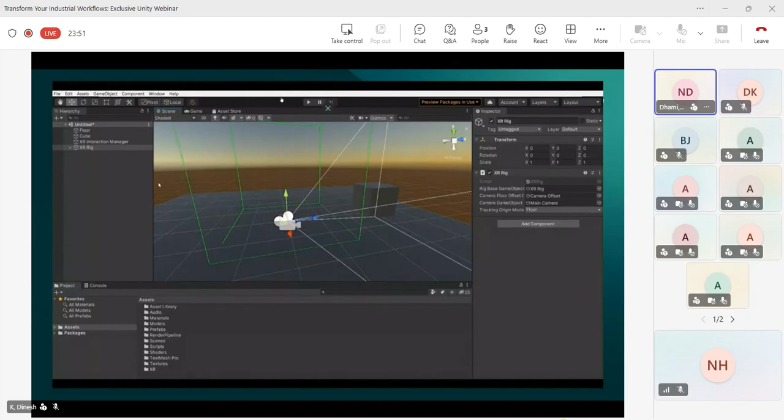Let's try to create a plane and see how easy it is to create an XR application. I've placed a cube, and I've also placed a room scale rig, so automatically my room scale use cases are sorted. I don't have to do much for configuring, and you can see the XR rig already contains components like the main camera, left hand controller, and right hand controller, with generic use cases already working.

So let's say if I want to add a grab functionality, I'll add an XR Grab Interactable script to my cube, and then it's basically working.

It's very simple, and Unity has been designed in such a way that you can easily work for almost all the use cases you intend to work on, with generic use cases already covered. These are the platforms we were previously talking about, the formats you can easily bring into Unity using the Unity Asset Transformer plugin.

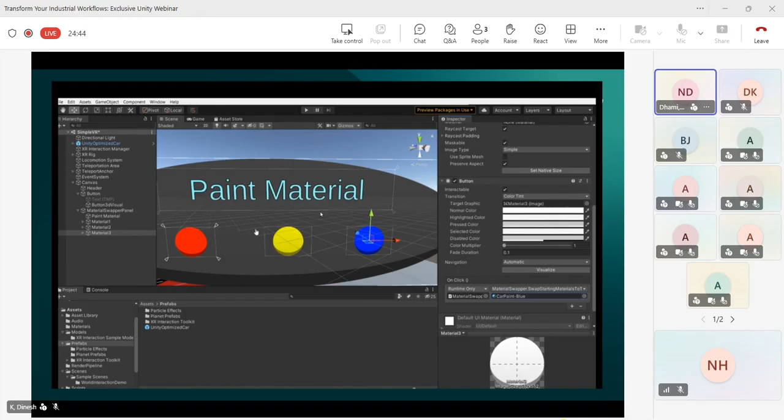Then there's another use case of creating a simple VR application, where again we've added plane components, and on a click of a button we're trying to swap the materials, or enabling and disabling them.

If I play it, and click any of the buttons of that respective color, I'm basically doing a material switch with a paint material. This is a pretty basic kind of use case we've created, and the material enabling and disabling code is not production ready, it's just for samples and demos, so I wouldn't recommend using it for other purposes.

Then there are global post-processing volumes and stuff, where you can tweak your lighting and look and feel the way you intend to use it for those particular use cases.

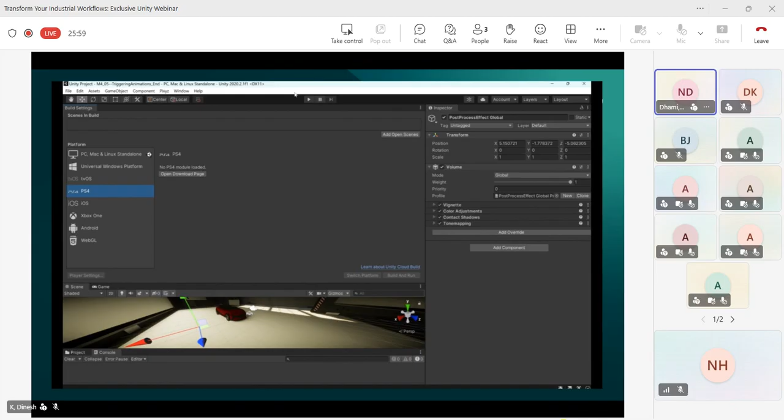Let's try to do a build as well. These are the platforms you're generally able to build for when using Unity, such as tvOS or Android. This is a sample application created by Volvo for their own use case, where you're able to change color, open doors, and add rotation.

Then, let's say if you want other movements like free camera movement, you basically add those positions to your camera, and you're moving to those particular places.

So these sort of use cases have already been created and are already being used. This is a simple series of steps that you have to follow.

You have to add XR Interaction Toolkit, and then respective plugins that you need, like XR Plugin Management. Let's say you're creating for Oculus, and these days even XR Project Validation is available, so you don't have to worry whether one plugin is conflicting with another. Those steps are already sorted for you, and it's very easy to use and create applications using that.

And not only this, in the other videos we'll be seeing that with the help of LLMs and the coming of AI agents, you can also integrate your AI agent using MCP server configuration, and it's pretty easy to code as well. Now let's move to the next slide.

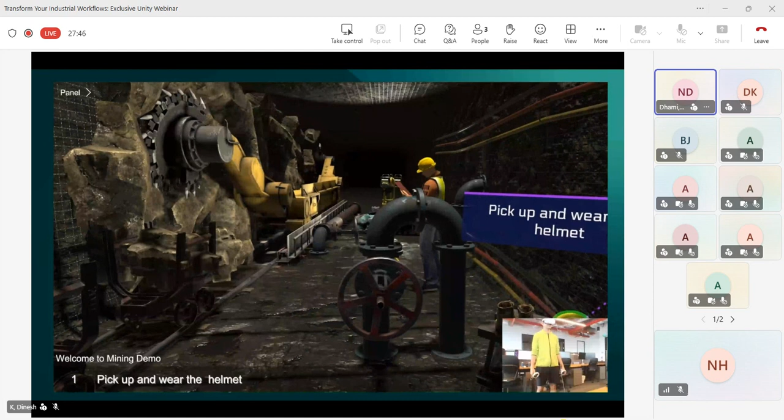Welcome to Mining Demo. Please pick up the helmet to begin.

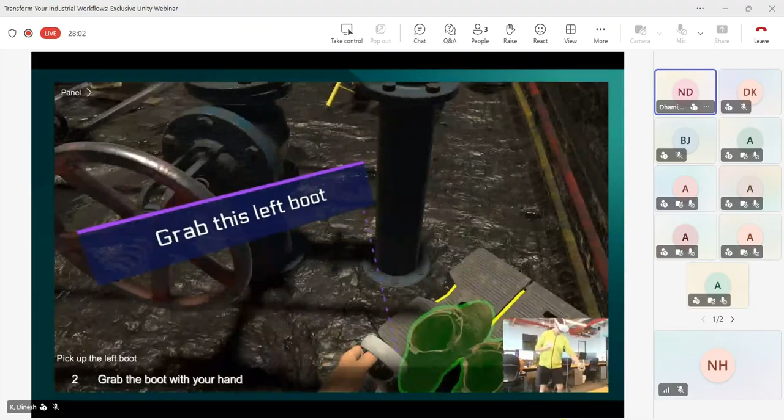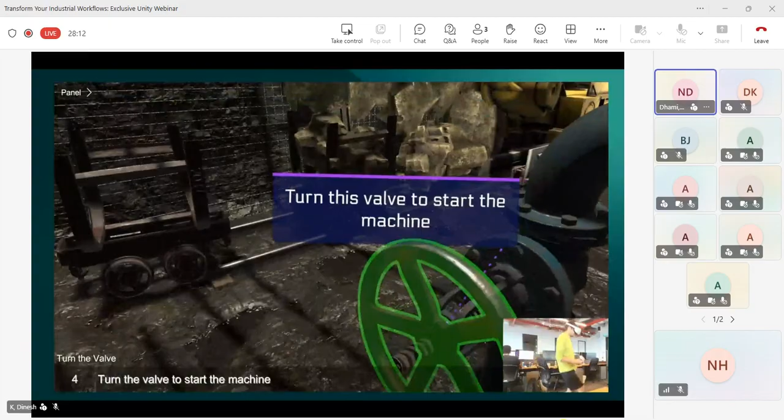So what we are seeing right now is a demo video of HTC Vive, and this is a training SOP application showing how it typically works. You have to grab a boot, and then do the next step for safety training. For use cases like safety training and critical operations, it's very important to train your workers, and all those use cases can easily be created as applications.

So on and all, we have seen how easy it is to create any sort of XR applications using Unity. The first step is importing your packages, drawings, your existing 3D data and other things using Unity Asset Transformer, bringing that into Unity.

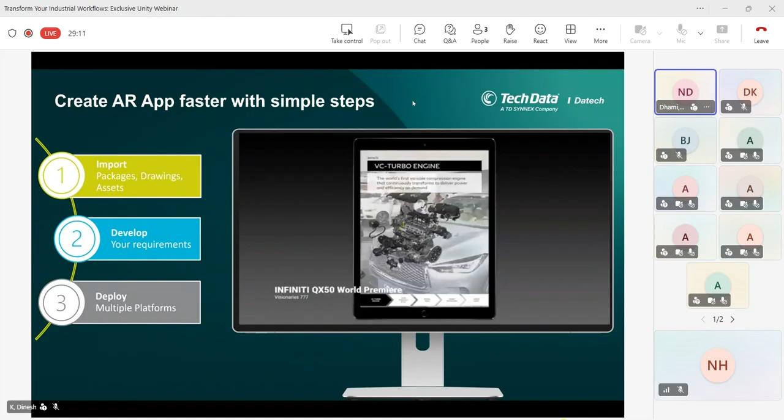Then you would be developing your applications, doing Connect - connecting your data with Unity-specific components that are available. Then you do Deploy, publishing your applications to multiple platforms that you intend to publish on. So these are basically generic steps for any sort of platform. Next slide.

Product configurators have become very famous these days, and a lot of companies are using them. We would be seeing how to create a product configurator using a demo video as well. Can we move to the next slide? Camille.

As step one, you would be downloading your package - let's say we are creating a new sample project. You need to set it to your Unity Universal 3D project, then go to an open source project published by Unity, and add it via Git URL. Once that's done, it's almost readily available.

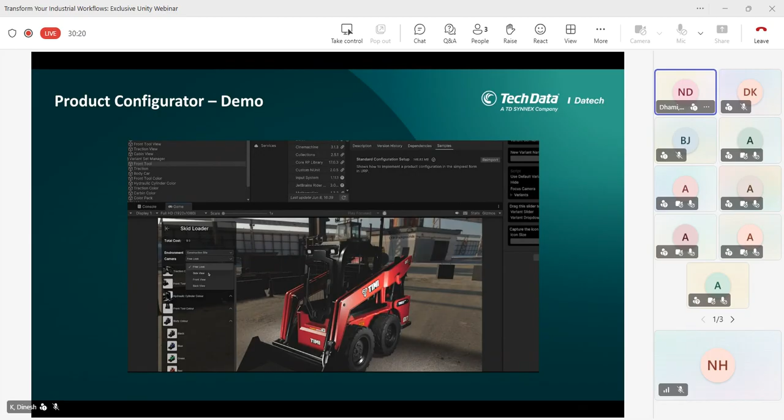Features like changing materials and colors, and changing the camera look - like free look or side view - those sort of features are already built up for you.

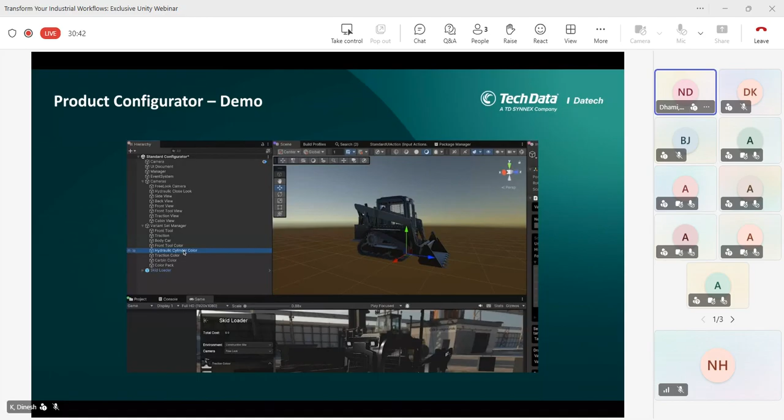So let's say you intend to create a product configurator application for your particular use case. It comes very handy, and all the components are there - there's already a scene existing which you can explore. So let's try to build our own one.

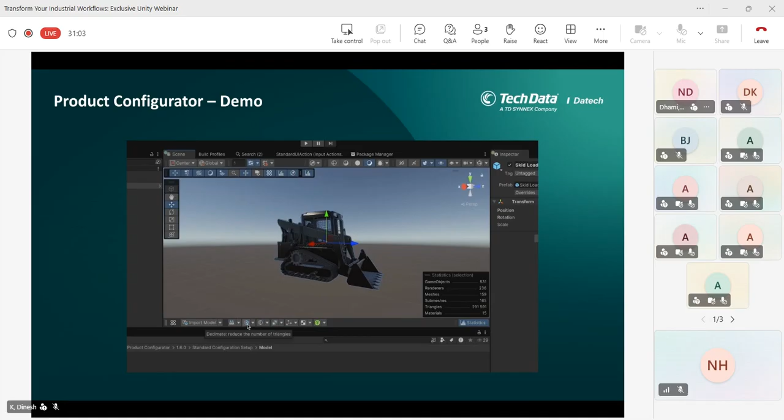So we'll create a new scene, and I've basically added an existing skid loader game object to the hierarchy. Not only this, you can also upload it to a particular asset manager page, and then the asset transformer page, and bring that particular model from there to here.

Then you add a material variant set. This is already a preloaded kind of thing, and you just have to add the reference material - like the black one - and capture what sort of new variant you want on a click. So it's a good project, I'd say.

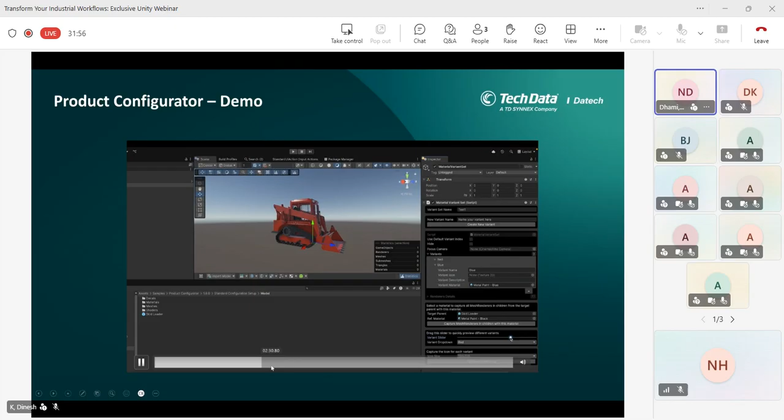If you are going to create your own application for this particular use case, you should definitely look it out. So now we are adding buttons, using the old Unity UI Toolkit for this use case.

So we dock it, and we have added a variant set - index 0, you've seen red now. Then what we do is, on click, we have configured the red button - on click of red it turns red, and on click of blue it turns blue. So we have linked that with the on-click event.

And now if you see, when it is being played - on clicking blue, I'm getting blue, and on clicking the red metal button, I'm getting the red metal button. So again, it is very easy to use a template like this that is already provided.

So now we are trying to add similarly the Cinemachine object package, and then we would be doing camera positions, so that we can add respective places where we want our camera movements, like flyby camera and stuff.

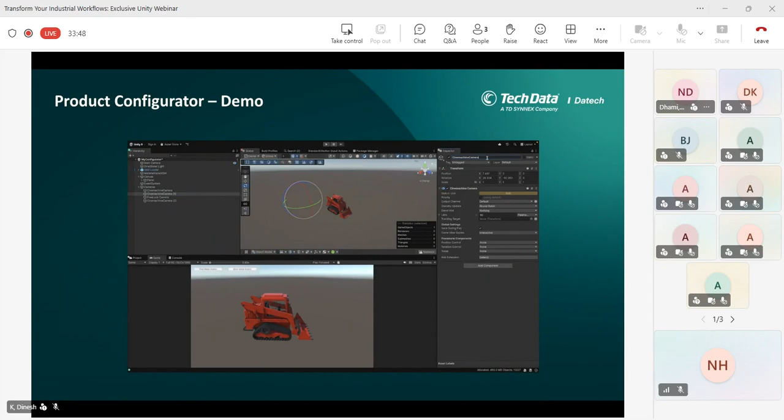So again, I have added the positions, Cinemachine position 1 and Cinemachine position 2, that you are able to see. And then I'm setting my angle, and I've added a free look camera as well. Then I'm adding everything under a single game object.

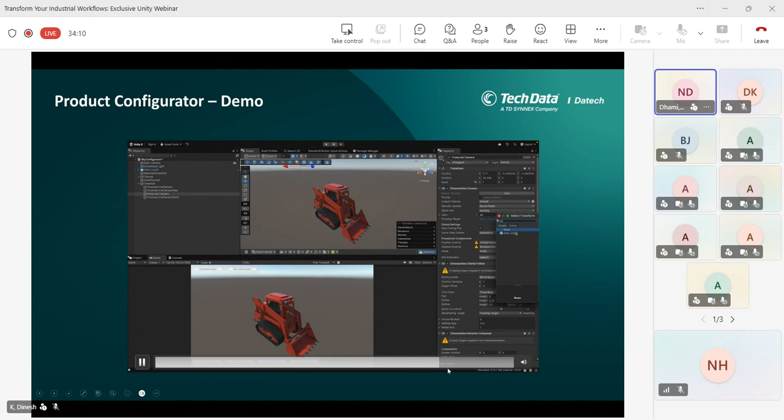So I have set the priority as well for my Cinemachine camera setup. And once that is done, I can similarly replicate the buttons. So for each and every position, I'll be going to a button, and on the on click event, I'll be setting where the camera should be moving.

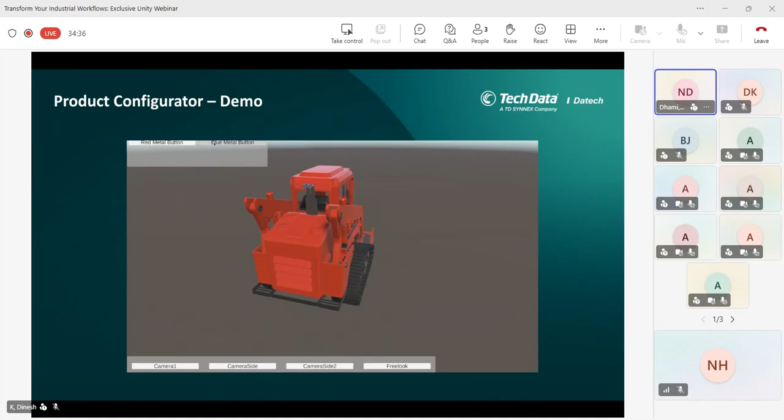So to multiple positions, I have respectively added where the camera should be moving. And also let's do a WebGL build for this time. So it is done. You have to do a build and run, and then in order to run this application on WebGL, you should be able to host it, using servers or any other local application if you're trying it local.

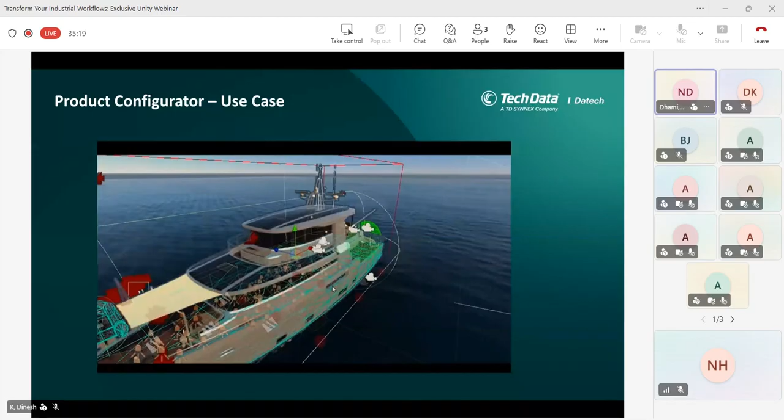Oxen created their Explorer vessel configurator in Unity with the help of Asset Transformer Studio for file optimization, streamlining their content production and driving pre-sales before the vessel was even built.

So many product configurators were built with Unity Industry, a special tier made for industrial use cases, by enabling dynamic, personalized 3D experiences for exploration and customization. You can enhance the overall buying journey, leading to higher satisfaction and increased conversions.

So as mentioned, product configurators are pretty common these days, and a lot of folks are using it for marketing, or letting customers explore how everything looks beforehand, and give it to the customer so that they can understand better. Now let's move to the another topic, that is HMI.

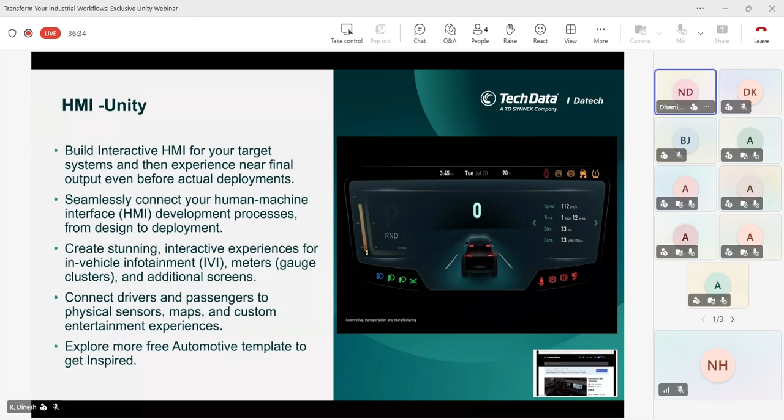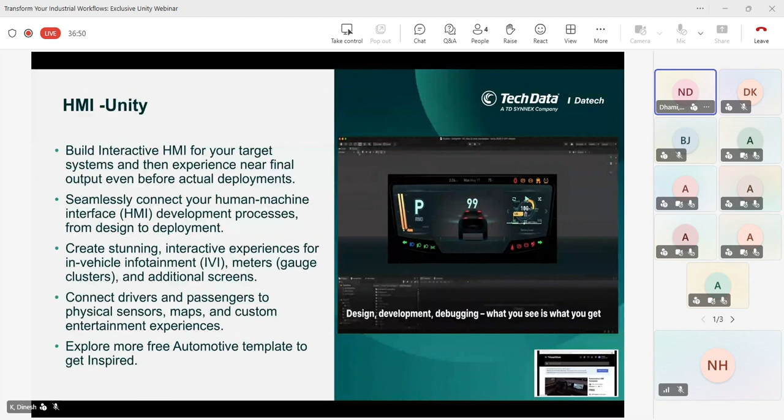Next slide, please. Now, using Unity 3D engine, you can not only create some applications like product configurators, or AR/VR applications. You can also create applications for your screens, right? You can build interactive HMIs for your target systems, and then experience almost near final output even before the actual deployment.

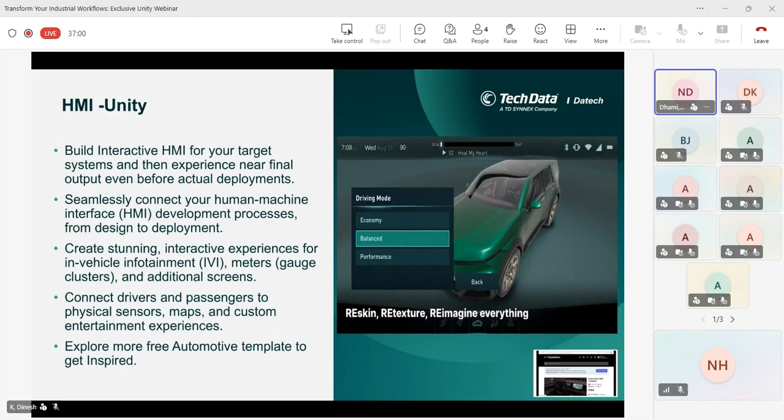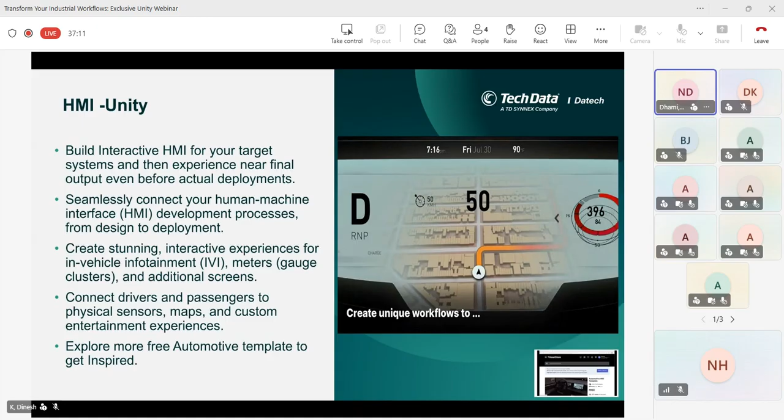So a lot of big names like Mercedes and BMWs are already using this to enhance their experience, because they're able to get sensor data and other stuff, and able to show that in a 3D interactive kind of fashion. Then it seamlessly connects to your human machine interface.

It's very easy. You are able to connect your drivers and passengers and physical sensors, and you can map custom entertainment experiences. And not only this, if we move to the next slide, you can see. Can you move to the next slide?

So pretty standard project, pretty handy, and it's a must try for use cases like single screen, multi-screen, split screen. You can learn and see even how to design such use cases, and how they are working behind the scenes.

So let's say in your car you want to access contacts for that particular use case, or for accessing other profiles.

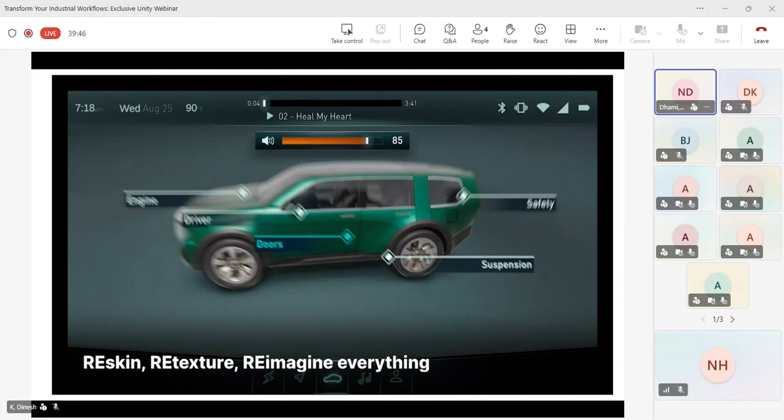So in an interactive or gamified format, you can show how to take routes, or how to play music, and you can do transitions, contacts, and other stuff. And then if you want to modify, or let's say your team and your stakeholders are not liking the design of a particular color, it's very easy to change it.

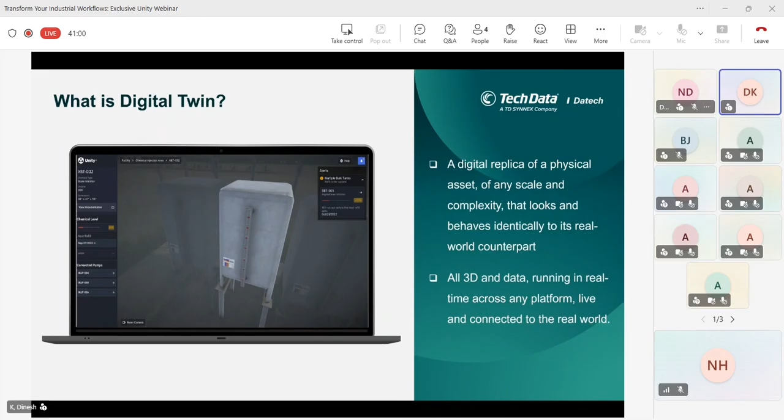You can do it. So that's the basic concept of a digital twin. Unity can also do that. So under Unity Digital Twin, we have around five levels of digital twins.

Level one is the virtual twin. For example, if you just need spatial awareness and want to experience that kind of thing, we call it a virtual twin. Basically, it's a physically accurate, realistic digital representation of an asset, so that you can experience spatial awareness and collaboration.

The second thing is the connected twin. So now the first twin is completed. Now you want to monitor real-time data and get that information, so this kind of thing we call a connected twin. It basically integrates with the real...

Okay, so there is, I guess, a fire safety hazard training going on in Dinesh's building. Let me just continue while he's back.

Then comes level 3, predictive twin, where you would be able to do predictions, as in analytics, decision assist, and predictive maintenance using your connected twin's data.

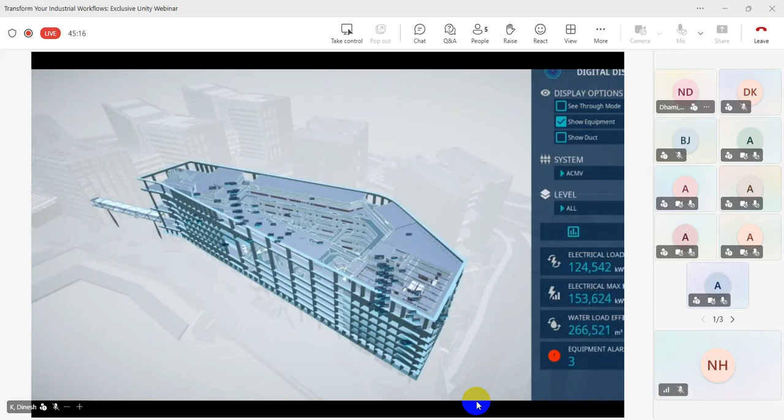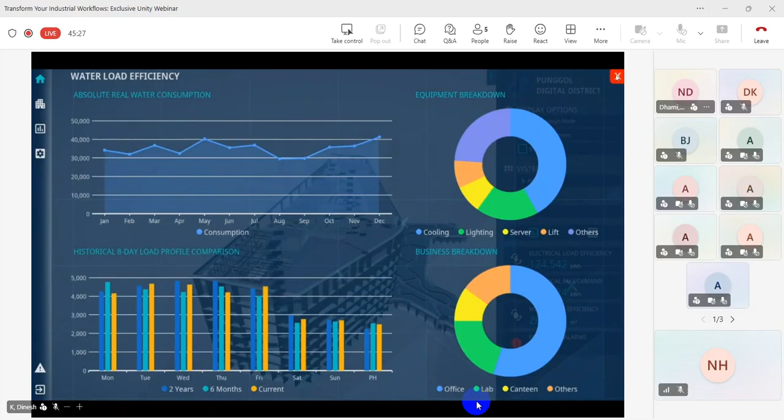The Estate Command and Control interface provides estate managers real-time updates on estate operations, such as power and water consumption, and electricity loads.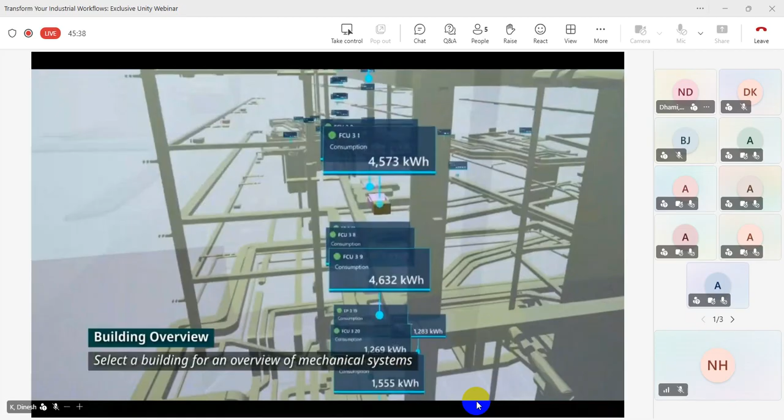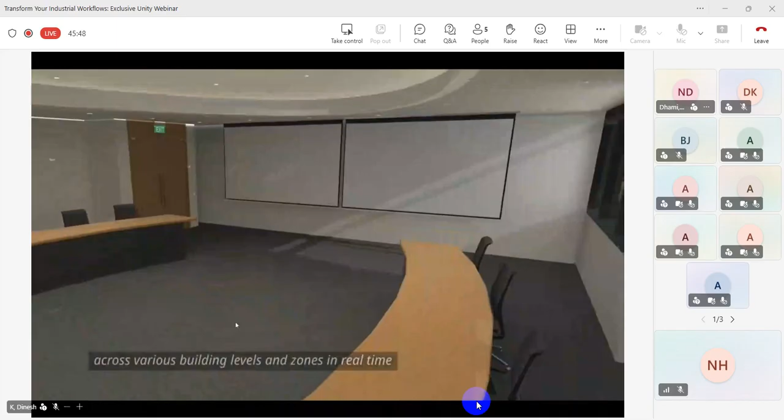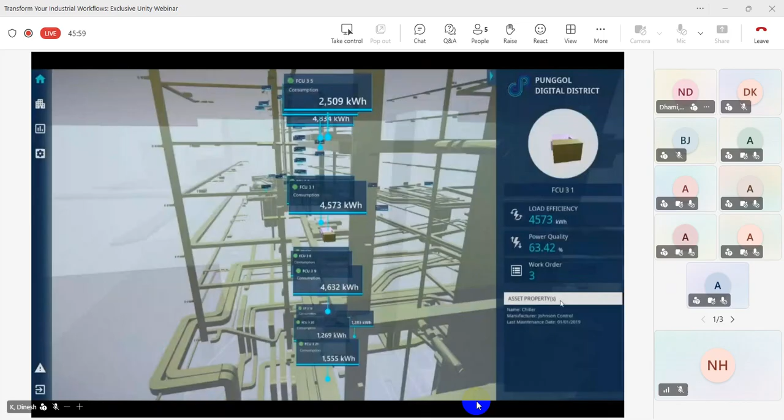In the building overview, visualize geographical positions of systems and assets across various building levels and zones in real time. Enable responsive maintenance with the help of real-time incident reports from the digital twin. Assign tasks to the nearest available staff to carry out maintenance and attend to incidents.

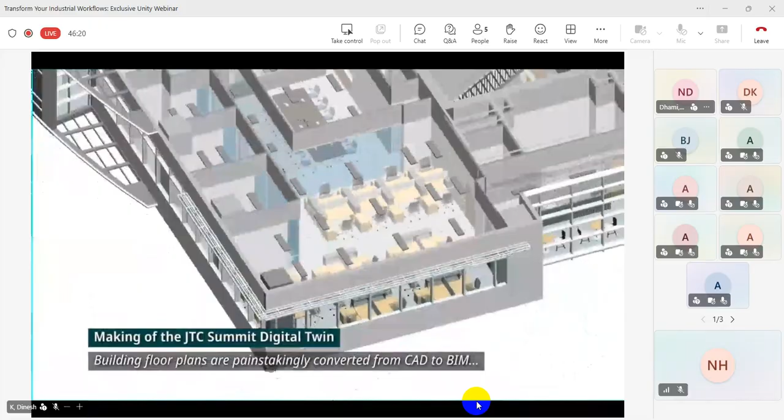The JTC Summit, a 32-story, 450,000 square foot building constructed in 2000. Building floor plans are painstakingly converted from CAD to BIM and meticulously textured in 3D to create a lifelike digital replica of the building.

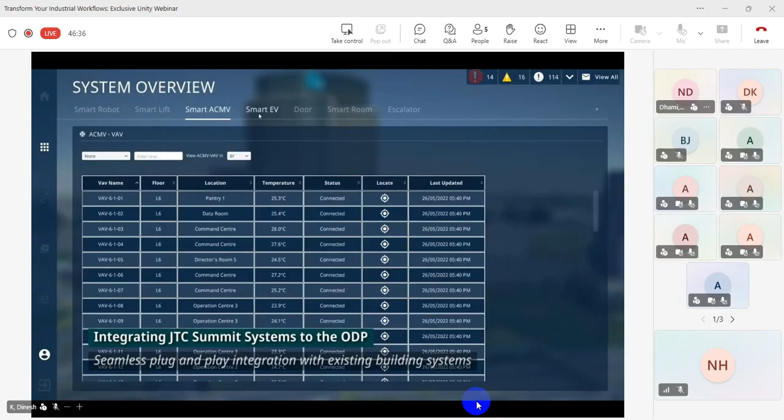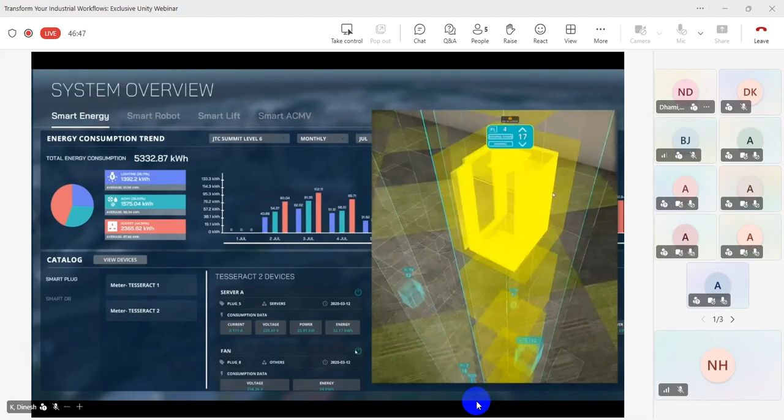The open digital platform allows for seamless plug-and-play integration with existing building systems. Monitor and manage systems such as district cooling and smart grid, car parks, human flow monitoring, fleet management, and urban logistics.

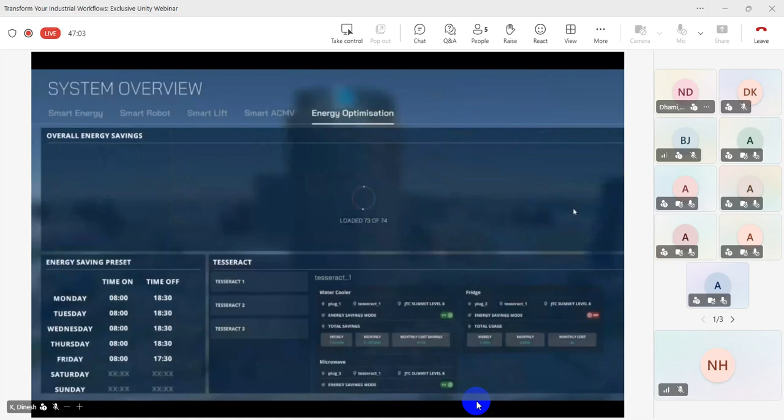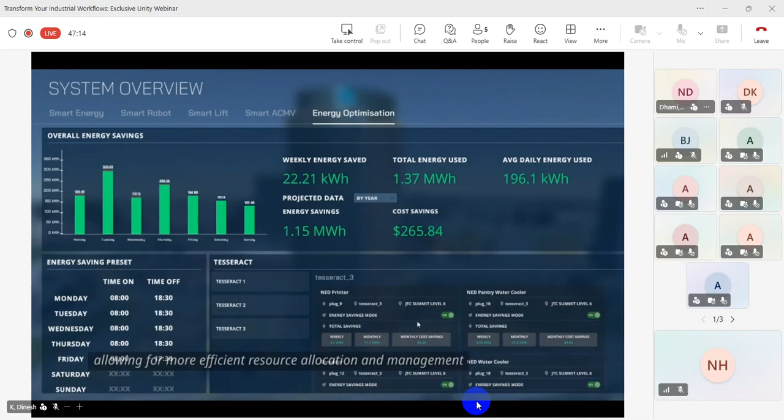Measure efficiency and load distribution with the help of charts and data analytics, allowing for more efficient resource allocation and management. Automate interactions between systems and repetitive processes such as mail and package deliveries.

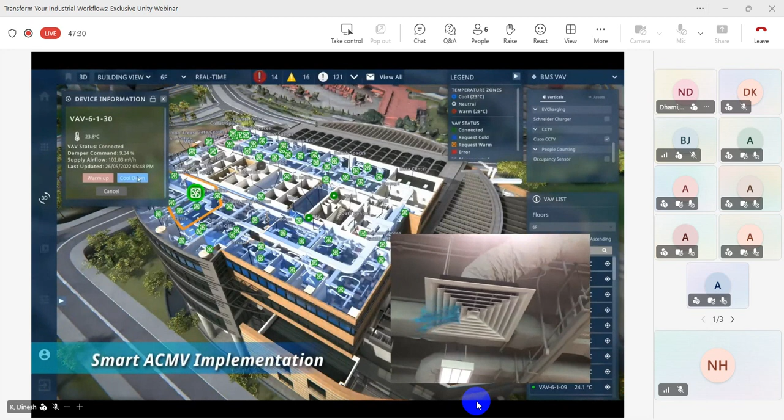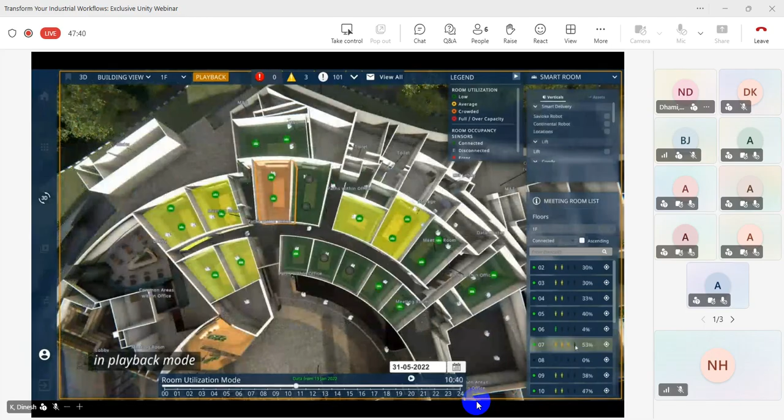Model real-world conditions within the platform. Simulate events over the last 24 hours using real-world historical data in playback mode. Simulate emergency situations to plan...

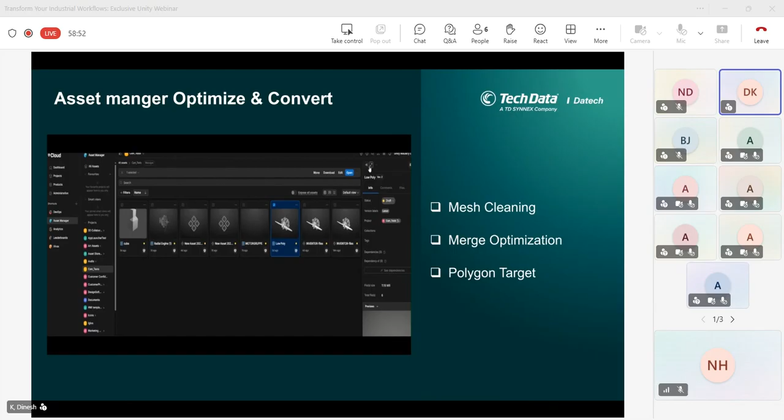Not only this, the user can also preview the model within the asset manager itself. For example, this model, I want to do a preview, and I can do a preview. This is highly helpful in terms of design review. For example, a developer wants to change something, give a review, and rectify it. So with the help of asset management, optimization, and preview mode, they can do it.

So this is the latest thing under Unity Industry. As Nitin mentioned, around 120 GB of cloud storage will be there. You can make use of the storage for saving the assets, and you can also optimize it.

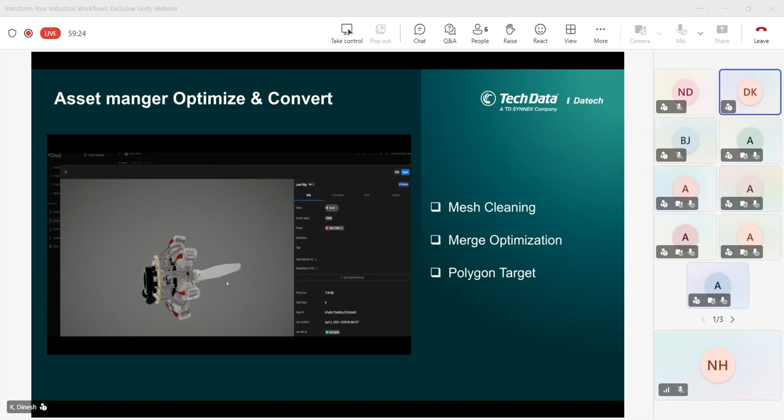Moving on to the next thing, the newest product launched from Unity is Unity Studio. This also comes along with the Unity Industry Bundle. So if you want to try any prototype kind of project, initially building something in the Unity editor, I would say Unity Studio will be highly helpful. It instantaneously creates a WebGL output, and you can do smaller simulations or any small product configurator easily.

So when you go to the Unity Cloud, these are the free templates that are ready-made available. You can make use of the template scripts and those materials, and you can work on Unity Studio.

So this is the Unity Studio interface. Once you enter Unity Studio, these are the camera navigation controls in terms of mouse and keyboard, and those are the navigation movements. Similarly, it looks the same as a Unity editor. Under hierarchy, you can see the same user dashboard like camera, plane, and animation, all those things. It will be synced.

And the important factor about Unity Studio is it integrates with your existing Unity Cloud asset management platform. So as previously mentioned, if you have any 3D files, you can directly connect your organization account and bring your assets into Unity Studio, and then do the development.

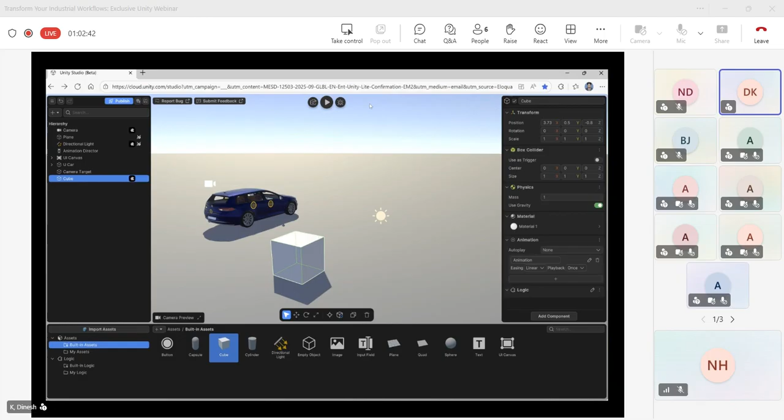Learning this is a very simple thing. There is free learning content available in the Unity official forum. If you type Unity Studio Learn, the tutorial will be there. It is a video tutorial. You can also learn how to create these logics.

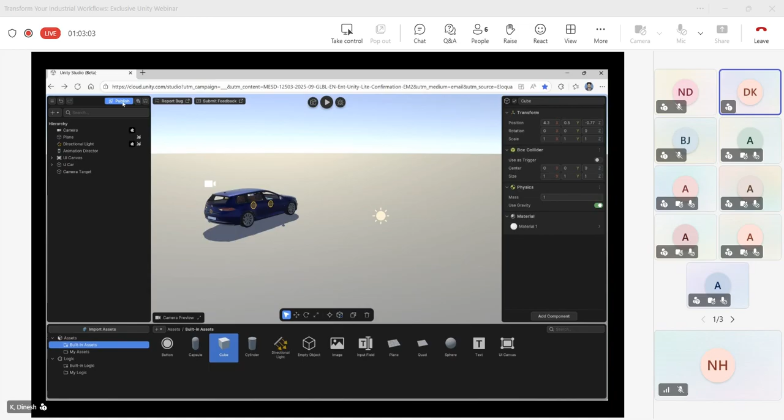It's very simple. At the moment, Unity Studio supports WebGL, so you can instantaneously publish in WebGL. For example, I'm publishing this current free template that is available. So instantaneously, compared to the editor, you can do an instant publish on WebGL content and deliver it.

Once your content is delivered, you just copy the WebGL URL and paste it in, and then you can see the projects you have created. So this is how, very easily, without coding and without much knowledge, you can create this kind of product configurator or any interactive prototype you want to create.

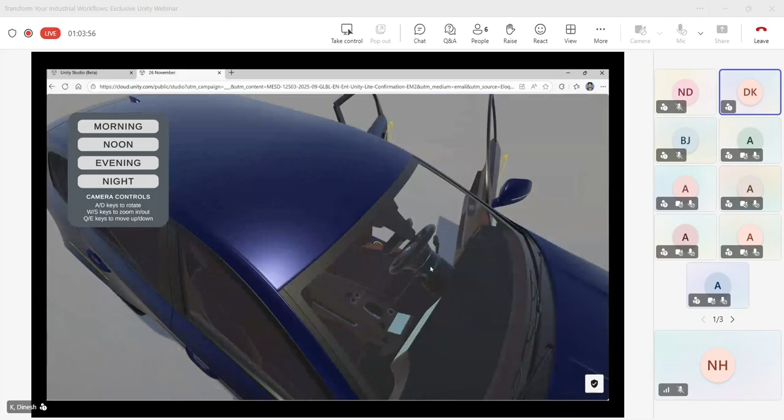So in the initial stage, if you want to create a small scale simulation, and later get into a real-time mechanism, Unity Studio will be the right choice, I would say. So if you are new to this, I recommend Unity Studio that is available. You can try it and experience the latest from Unity.

So moving on to the next thing, that is our next product portfolio: Unity Asset Transformer. For example, in any 3D development, we need a technique because a model can be heavy, especially if we receive it from a third party modeler, or if we have designed the model in a heavy CAD file format. At this time, the Unity Transformer from the Unity portfolio will be useful.

So the first thing we're going to see is the Asset Transformer Toolkit. As earlier mentioned, this Asset Transformer Toolkit is available in the Unity Industry package. Basically, if you receive a model with a heavy file size or low polygon count, you can increase the polygon count in order to enhance the visual quality. These kinds of automatic operations we call tessellation and optimization.

For example, you can create a rule set, and if you want to increase the triangle count in order to make the car look more realistic, those kinds of things you can do in this Asset Transformer Toolkit.

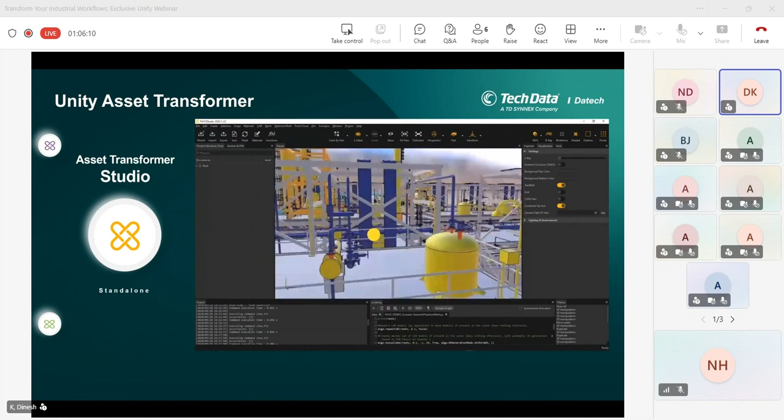We call it Asset Transformer Studio. It's basically the same kind of plugin, but in a more handy format. Not only tessellating, if you have any CAD model you want to repair, do some mesh cleaning, or edit point cloud data, those things are available in this Pixyz Studio. As you can see, there's a tessellation algorithm—if any wireframe model is brought into Pixyz Studio, using this tessellation algorithm you can optimize or enrich the visual quality.

A typical use case for Asset Transformer: when files have heavy file size, they want to optimize to a certain polygon count and export to the desired file format. So if you have difficulties with file conversion or optimization techniques, I would say Asset Transformer Studio in your pipeline would be the highly recommended choice.

Moving on to the next thing, the Asset Transformer SDK. Whatever we saw is the manual process in Studio. If we put that into more automation, that's the Asset Transformer SDK. Instead of clicking the button, if you have a batch of files and want to do it in a more automated way, that's how the Asset Transformer SDK works.

For example, if you have an STP file with a heavy file size and want to reduce it into a certain file type like FBX or OBJ, instead of manually doing it, just write a Python or C# script, run the batch file, and Pixyz's SDK will do it for you.

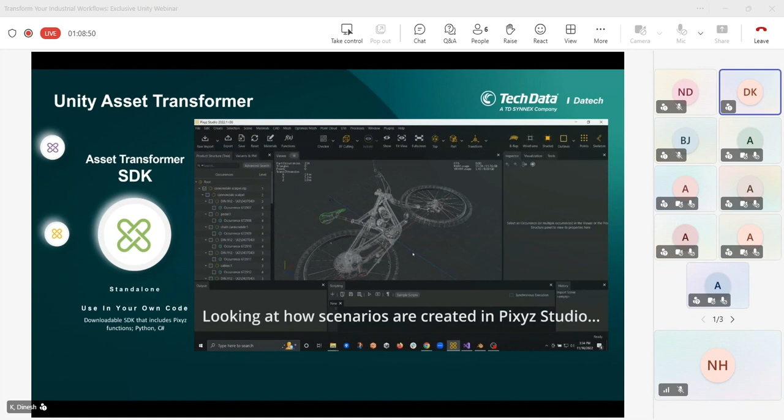So, a quick summary on how to choose from this Asset Transformer portfolio: if you are already in Unity Industry and just want a little mesh optimization, and want to directly import CAD models—around 70 plus formats like Navisworks or Revit, any files from the leading CAD industry—I would say Asset Transformer Toolkit along with Unity Industry would be the right choice.

Or if you have only a 3D artist team and want to do things manually, with fine-tuning control of your mesh, data preparation, and optimization techniques, then Asset Transformer Studio would be the right choice.

And if you have a large number of files and want to automate without any manual intervention, I would say Asset Transformer SDK will be highly helpful for converting those files in a more automated way. So this is the overall portfolio on Asset Transformer.

If you have any further demos or queries needed in particular, you can always reach out to our team as well. With this, we have come to an end.